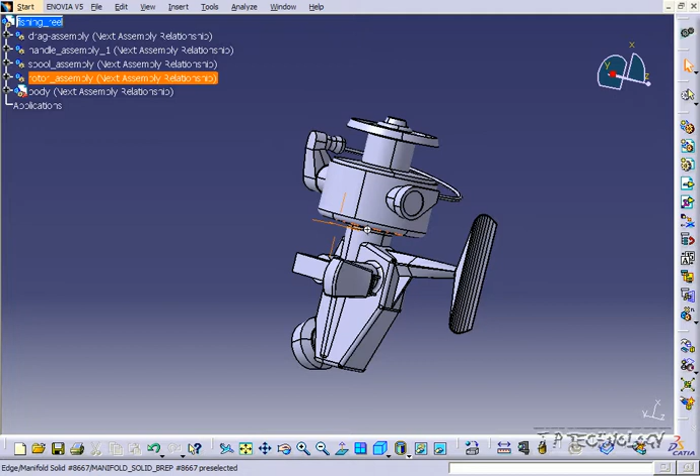Let's go back to, and what we're going to do is I'll show you first how to zoom in and zoom out with your mouse. Hold down mouse button 2 and then click mouse button 3. You can see the icon, the arrows going up and down, and if you push forward, it's going to zoom in, and if you pull it towards yourself, it's going to zoom out. Try it again: mouse button 2 hold down, click mouse button 3 once, and you can zoom in and zoom out.

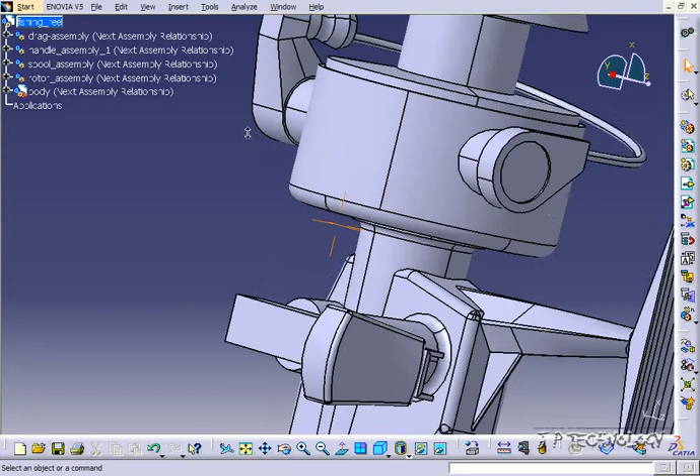Now I'll show you how to rotate with your mouse. Hold mouse button 2 and hold mouse button 3, and you'll have that little hand there. If you move it around, you'll see that you're able to rotate and move the whole part or assembly all around.

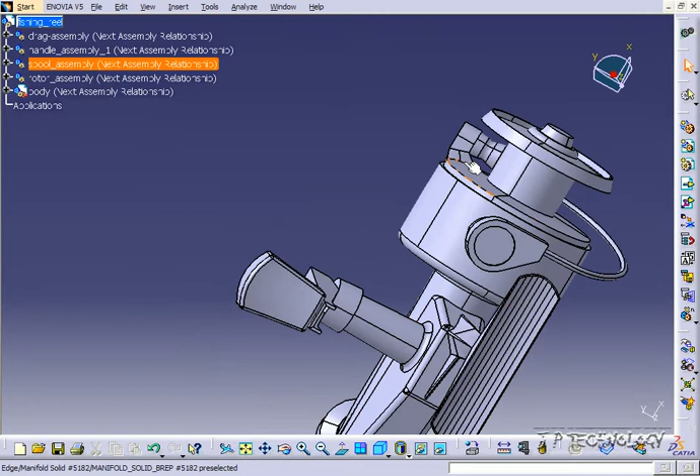Now let's zoom out, and if you just press and hold mouse button 2, you're able to pan and move the part around in space. Let's hold the part and move it to the right, then put your mouse to the left and just click mouse button 2 once.

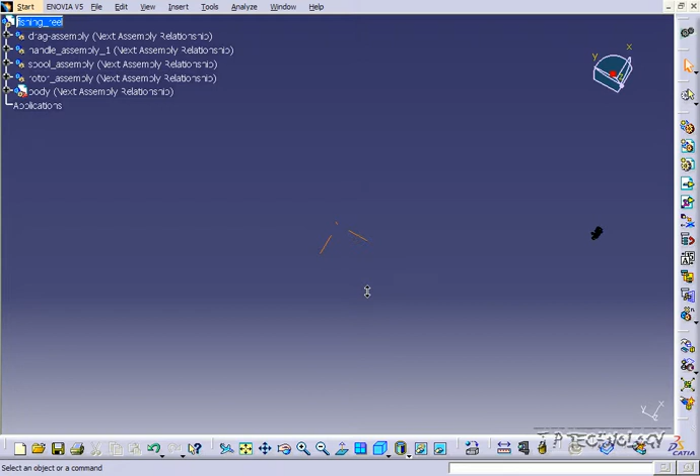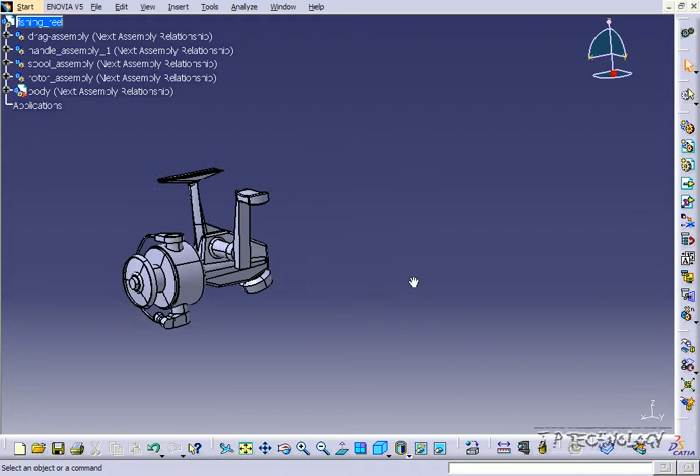What that does is create a new center point of rotation. If we zoom out a bit more until we can see the part, and hold mouse button 2 down and mouse button 3 to rotate and move around, you'll see that we're now rotating on a much larger scale and larger axis. Now pull the part into the middle and zoom in again, and try to rotate again. Compared to before, it's very finicky as we're using a much larger radius to rotate around, and you don't get the same results.

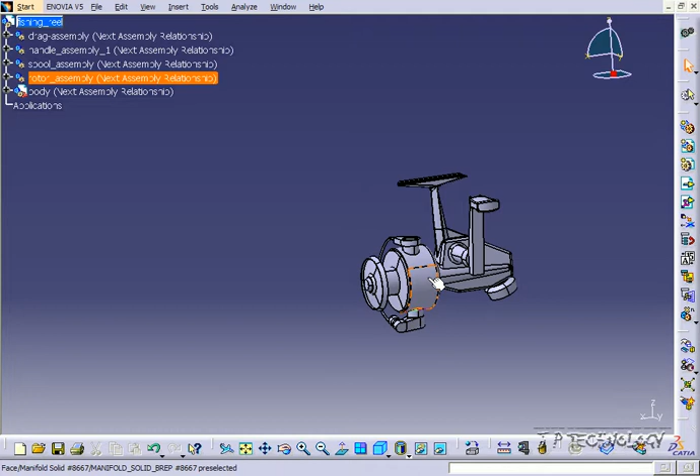Now all you have to do to get back to rotating close in tight with your part is click mouse button 2 on the point where you want to rotate around. So say I want to rotate around this bit here, just click it. Now that's the center of rotation, and your part's going to rotate around there. You can change it to any part or feature on your part or assembly.

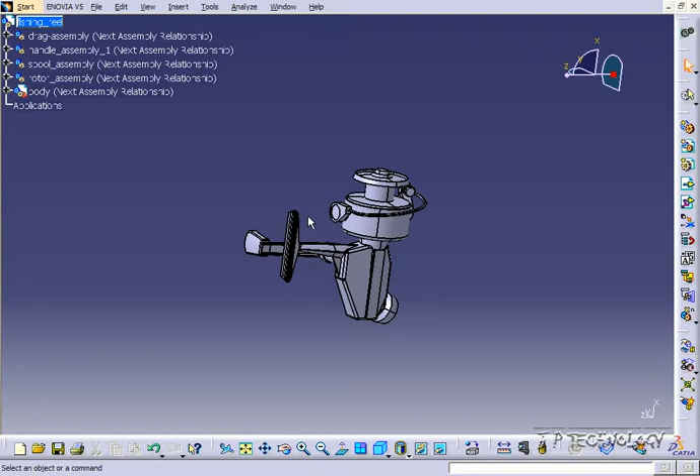So mouse button 2, if you just click it anywhere on the part when you're in a file, it's going to create a new center point, your point of rotation. Again, like I showed you, if we zoom out and click on the side, now we've got a big arc, a big circle. When we zoom in and click on the part, now we have a small circle.

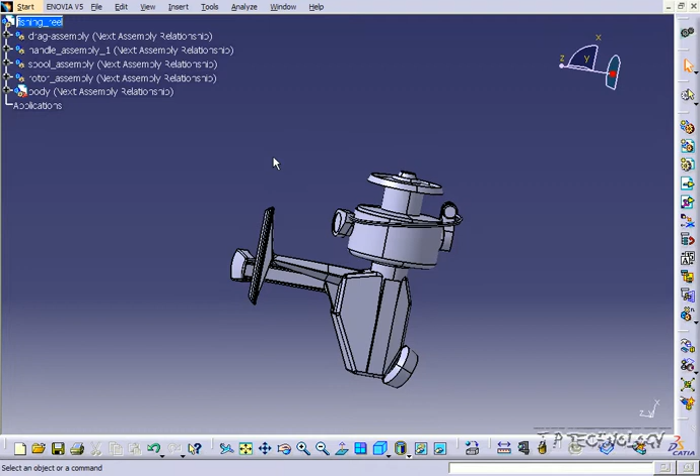It's a very good tool to know how to change your rotation point, because when you're dealing with larger assemblies, your rotation point may be far and you might have limited use, and when you need to focus in on a certain part or feature, you need to click on it to be able to do that.

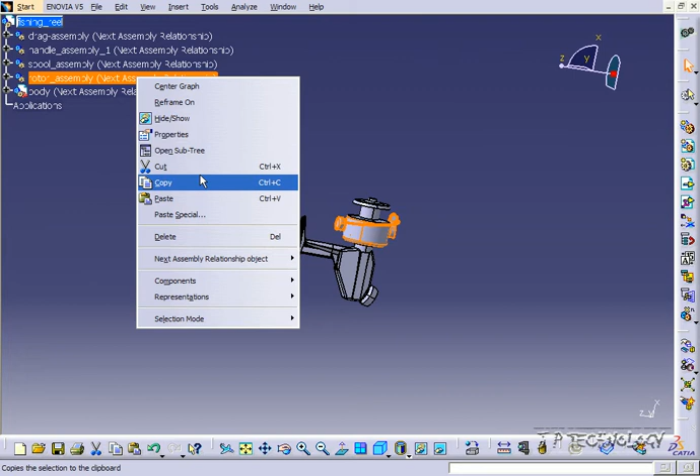Mouse button 1 is just clicking on the parts, and you're able to highlight it. If you click mouse button 3, you get more options. This is more like in Windows when you're clicking mouse button 1 and mouse button 3 to select an object and get some more details of it.

And that concludes our tutorial on the mouse buttons within Catia v5.